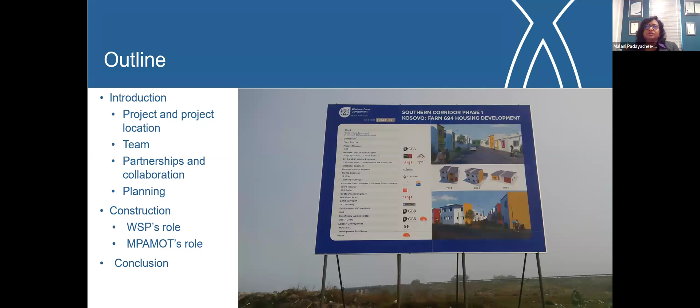I would like to very quickly put the project in context in terms of location. The project is located in the Western Cape. It is the Kosovo informal settlement, which consisted of a number of consolidated stands to ensure that the population of both Kosovo and the Woodlands community could be housed in one location. It is located north of the R300 and immediately west of the Philippi Police Academy. The properties are close to the R300 Jakes Gerwel Drive and M7 intersection and immediately adjacent to the Philippi station.

In 2019, when we started actively looking at the first phase of the project, there were 6,500 households on 21.4 hectares of land, a very highly dense composition of households. However, the intent was to accommodate these residents at a lower density of 120 units per hectare. With the land available, we would only be able to accommodate 2,600 units, which meant that the remaining 3,900 families would need to be located on alternate land in subsequent phases.

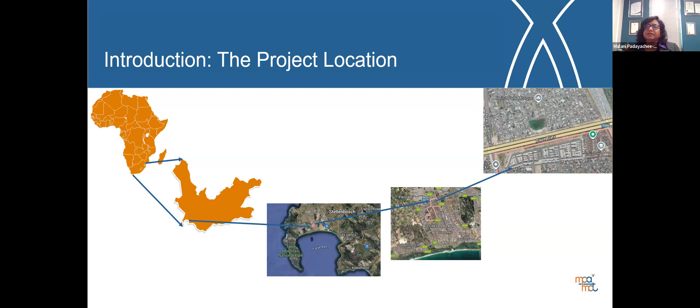In terms of the collaborative initiatives, the Kosovo Informal Settlement project was one of 18 priority projects that the City of Cape Town identified to look at housing issues within the Western Cape. The Southern Corridor Phase 1, which was the Farm 694 Kosovo Housing project, comprised both internal and external civil and bulk engineering services, and 434 housing units, which qualified for the National Housing Subsidy Scheme.

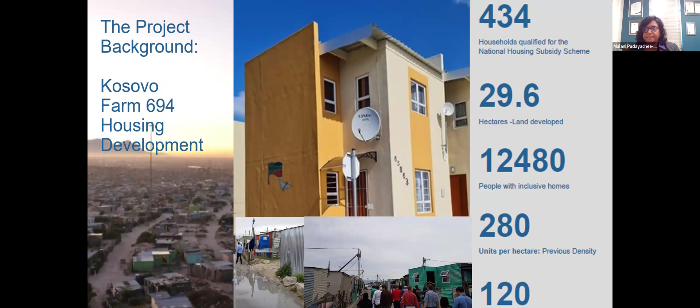The project team that executed this is shown on your screen, and it comprised various individuals within the built environment professional space. This project could not have been actioned, because of all the complexities associated with the initial planning stages, without the joint effort of the project team. The other point worth looking at is the project partnerships and collaboration initiatives that had to be implemented during the execution.

Whilst this was predominantly a housing project, the involvement of the City of Cape Town, particularly in the bulk infrastructure that allowed us to unblock the housing project, was substantial. It was a very close collaboration between the City of Cape Town and the Department of Human Settlements, which is now called the Department of Infrastructure, which allowed the project to be realized.

In terms of the initial planning phases, as I indicated, the construction start was in September 2019. However, this particular project goes back a few years because there were a lot of interventions that had to be done during the initial planning stages of the project, particularly around the interventions associated with the communities. You can imagine that it was a highly dense area with a number of households in backyard shacks, etc., occupying 21 hectares of land. And as a result, a lot of matters pertaining to community interventions had to be addressed.

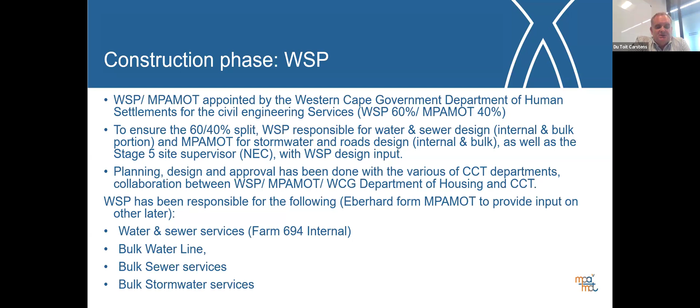So yeah, the planning and design included all the various approvals for all the City of Cape Town departments, and a lot of collaboration between WSP, MPAMOT, and the Western Cape Department of Housing, as well as the owner and client of the services that have been constructed. Eberhard will discuss the other services, but I will briefly touch on the water and the sewer services. That's internal services, then the bulk, as Malani has indicated, the bulk developments, first Farm 694, and then the rest.

So the bulk water line basically provides for about 650 meters of a 315 diameter water strengthening line along New Eisleben, upgrading or strengthening the existing network present at 694.

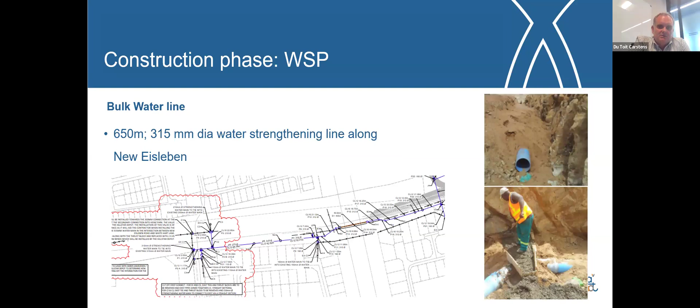Then the next portion we've been involved in is the bulk sewer lines. For the bulk sewer lines, 1,250 meters of the existing 900 millimeter dia sewer pipeline had to be upgraded to a 1,200 millimeter dia concrete sewer outfall line, which has been lined with HDPE AKS lining. And then also there's an upgrade that was required for about 1.15 kilometers from the existing 900 diameter to a bigger size, a 1350, also to a concrete sewer outfall, along Park Avenue, then further on to the Mitchell's Plain wastewater treatment works.

But further, the project includes structures for this sewer line, which were quite big, as you can see on the picture on the right-hand side below. It's about an 11 by 5 meter sand trap that has been constructed. The pictures on the top also indicate the 1350 pipelines that are AKS lined, and also a top view from a manhole that goes about 8 meters deep.

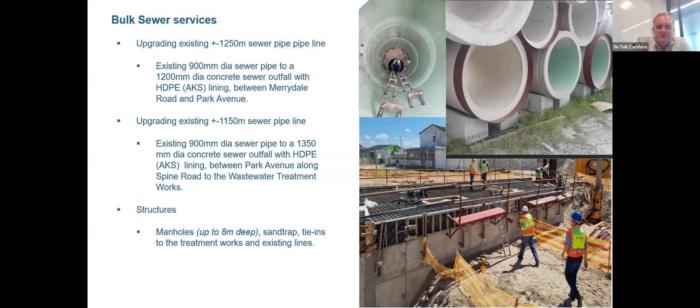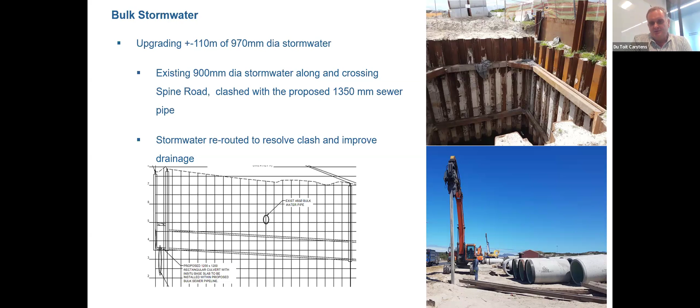We also had to upgrade about 110 meters of an existing 970 millimeter stormwater line. The reason being that the slopes in the area are naturally very shallow, and there was a clash with the existing line. And therefore, we also had to micro-tunnel the stormwater line to ensure that it doesn't clash with the 1350. The pictures on the right show the sheet piling where the micro-tunneling starts, and you can also see below the excavator pushing the sheet piles into the ground.

Okay, so the way this has been done, both the sewer lines and the bulk stormwater line, is with trenchless technologies. So WSP utilized one of the contractors that tendered, and appointed was Power Smart JV. We utilized the alternative tender offer for micro-tunneling by a specialist subcontractor, CSV Construction, as you can all see on the right-hand side picture. Now, the reason for deciding to go the micro-tunneling of the trenchless technology

and also reduce major risk to the community and the project because it will cause limited excavation. If you go open excavation, it will cause major traffic disruptions, also including disruptions that will have to be closed for the construction periods. And the alignment of the bulk sewer goes through schools, parks, and major roads.

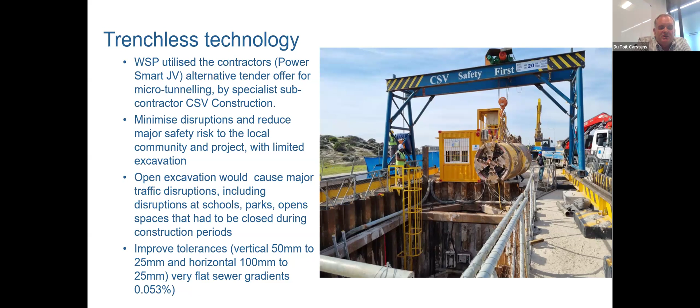The other big advantage of trenchless technology is to allow for improved tolerances, standards of 50 and horizontal 100. With the trenchless technology, you get like a 25 both vertical and horizontal, and there's very flat gradients where the gradient was 0.053%.

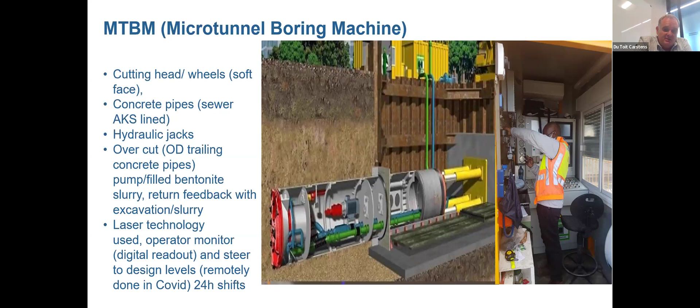Other big advantage, the micro tunneling machine or boring machine, you could do it remotely, and you can also do it in 24-hour shifts. And the micro tunneling in the COVID period, we did that remotely from Germany for a while.

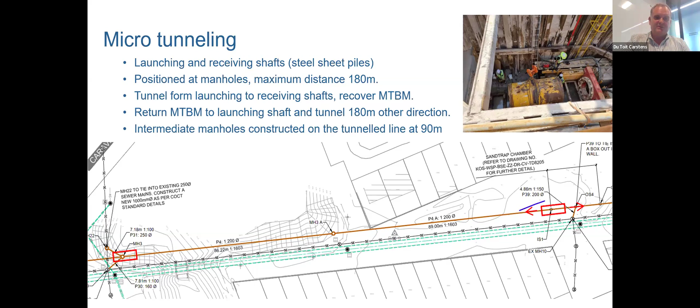In this case, the maximum they can go is 180 meters. The specific section was a bit less, but in Spine Road we used 180 meters. So you're jacking for 180 meters to the left, and at the receiving shaft they take the micro tunneling machine out, put it back into the shaft on the right, and then it drills 180 meters to the other side, where it's then recovered. And the last thing that is important is that because it's 180 meters, right in the middle of those two shafts we excavated and constructed the intermediate manhole from the top.

There was the video, Melanie. Toit, you can proceed. I'll show those videos at the end. Yeah, I will. Okay, I will just continue then.

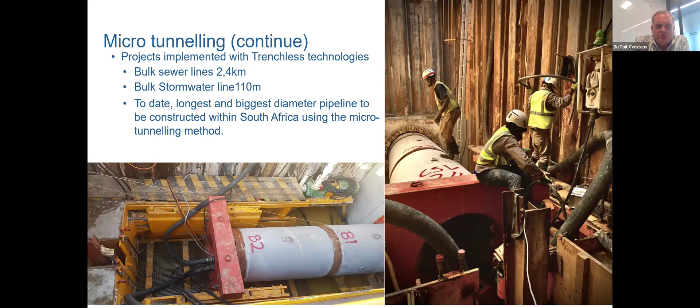Okay. Melanie, are you going to show us a video now, or are you going to show it right at the end? We'll do it right at the end, Toit.

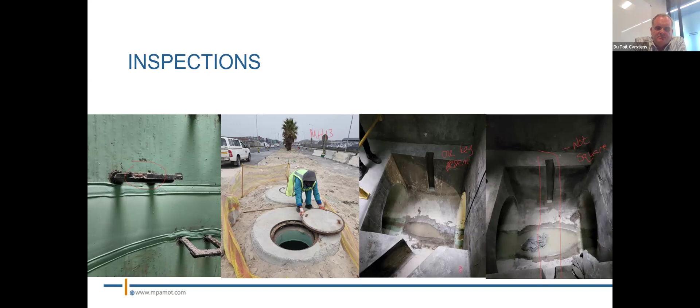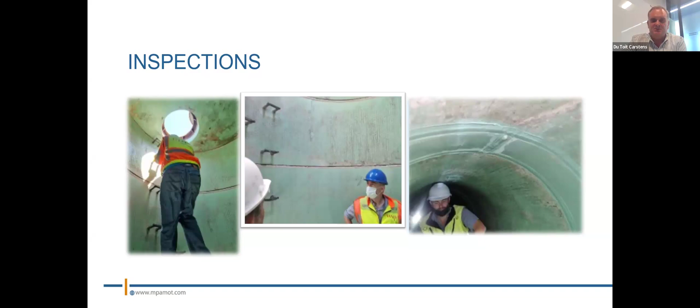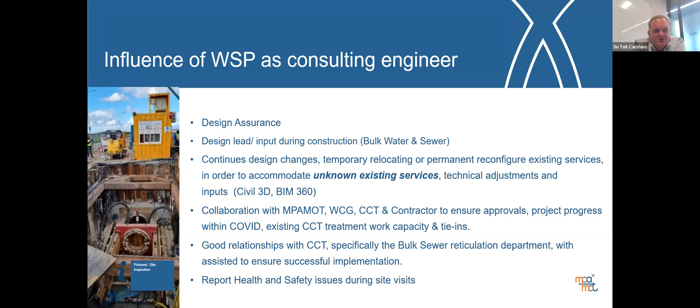Ange here. I'll be covering the MPAMOT Africa portion of the project, which consisted of mainly the internal services and top structure, and then some external road upgrades. The internal services consisted of surfaced roads with curb and sidewalks, stormwater drainage and a stormwater management retention dam, a fully reticulated water supply and wastewater drainage system, which was designed by WSP, and then also ducts for electrical services.

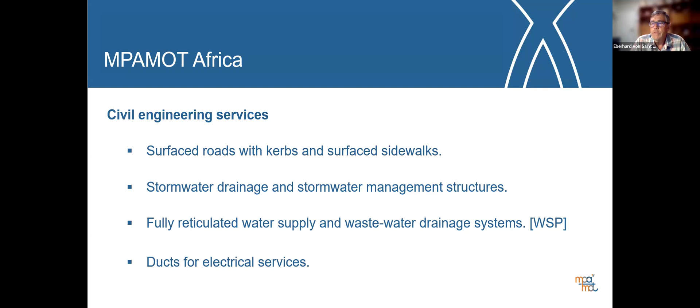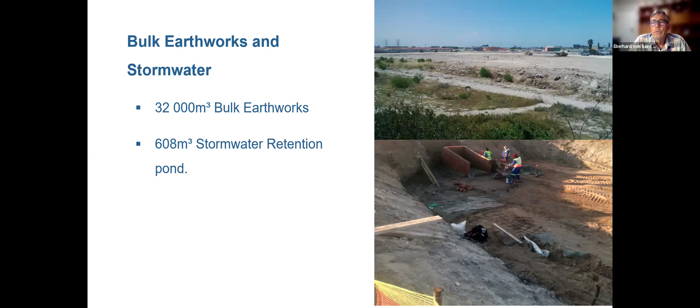If you look at the two pictures, the top one is where we did bulk earthworks, to at least generate some slope on the project. And the bottom one is the start of the stormwater retention pond, which has to be done on all City of Cape Town projects. That is to ensure that the post-development flow, due to the hardening of all the services, does not exceed the pre-development flows.

Then we've got a picture here of some bulk roads and intersection upgrade. On the right-hand side at the top, you will be able to see the top structures, and a left out onto New Eisleben was constructed with a lengthening of the median, as the local population did not want all the traffic to go through the township along Walter Bathurst Road.

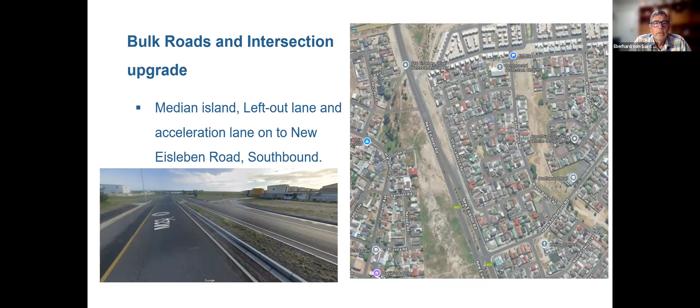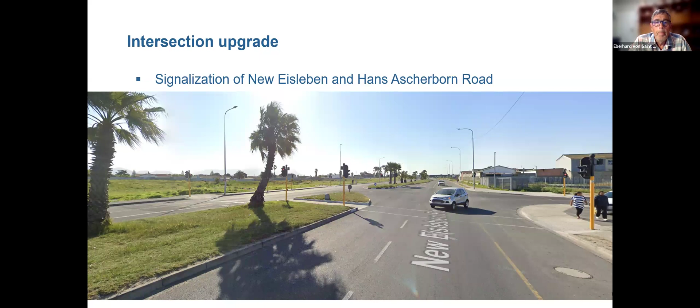And then on the next slide, we've got the signalization of Hans Ascherborn and New Eisleben. Both the left out construction and this signalization were requested by the city traffic department. Here's just some pictures of roadworks and more roadworks.

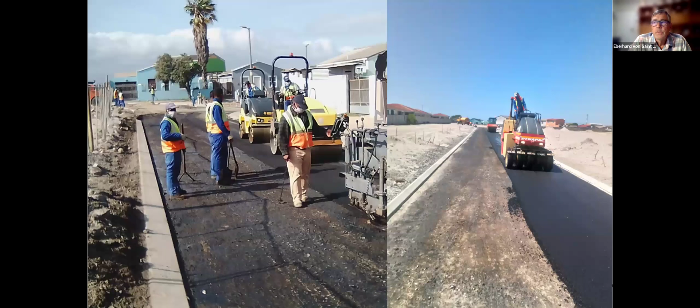And then, designed by Element Consulting Engineers, the electrical installation was also done during the contract, and so there were 3 mini substations and then the low voltage underground reticulation to metering kiosks, and then also service connection to each house, and there was also street lighting done.